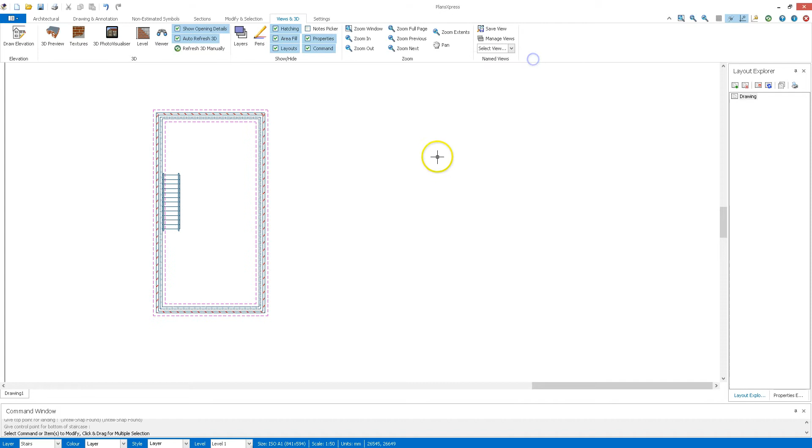Now I've started off with a straightforward ground floor, nothing fancy in there except a set of stairs I can use as reference. Now when drawing a loft you have to create a new level, as we'll be drawing in the loft space itself.

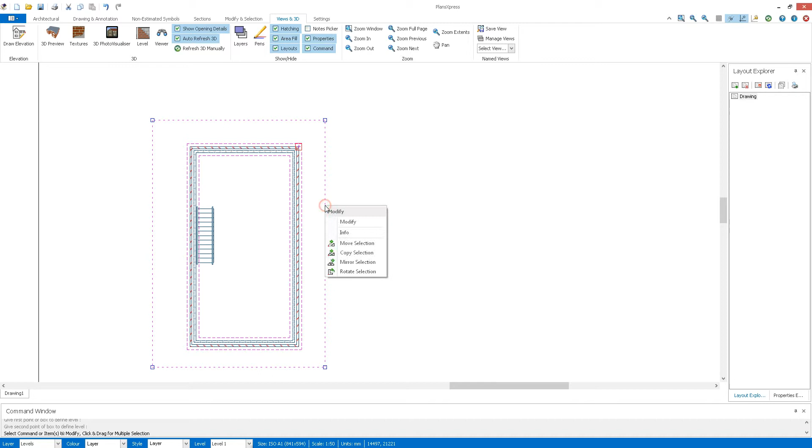So I'm going to grab the levels tool, set my wall height as 2400, as that is what these are. Draw around there, so I've got that level, highlight that, pink dotted line, copy selection, give a reference point, shift and place. Now wall height, I'm going to leave that there, but I'm going to set these wall heights here as 0. This is important, so when I click OK, you shall see that these are here.

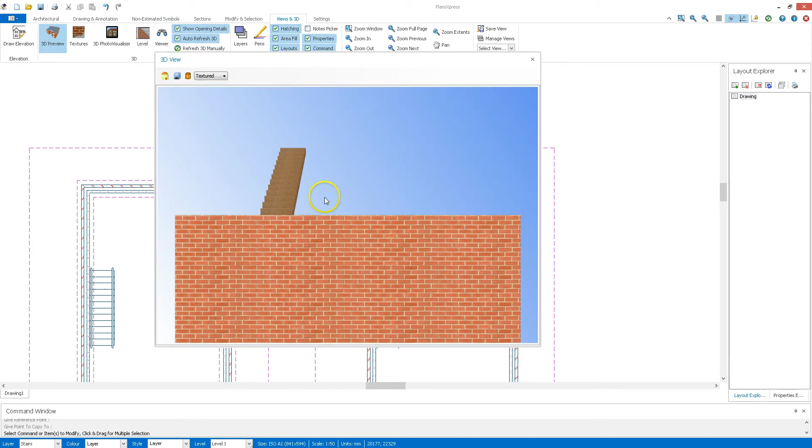If I go to the views in 3D, there's actually nothing there to show. At this point as well, I'm going to grab those stairs, modify selection, and just explode them using the tool, so they no longer show on the 3D, but the lines still exist individually.

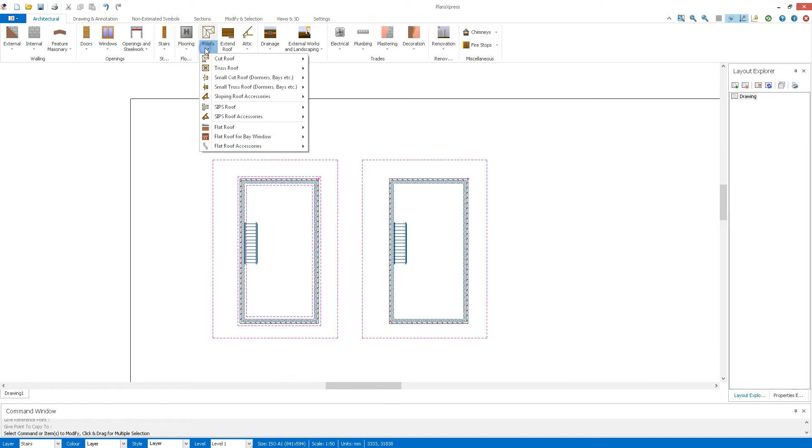Now I'm going to go to my architectural, grab a roof. I'm going to grab a cut roof at 40 degrees. There you go, leave these options as default. Now this building is 5.5 meters wide and 10 meters deep.

I'm going to grab an apex roof on this one now. Select the wall I want to place this on, so the 0 height wall there. That's my apex, or my gable end there, and then the link for the roof.

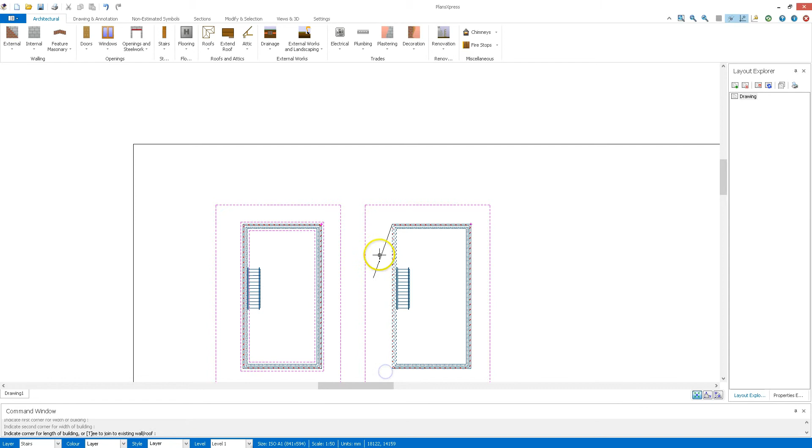I'm not going to consider flat ceiling or any of these options at this point, I'm going to just say no. But as you will see, if I go to the views in 3D now, select 3D preview, I've now got a roof on top. Okay, now I've just done it straightforward on the ground floor here, but obviously when doing your own, it could be on any point of the building, on any level.

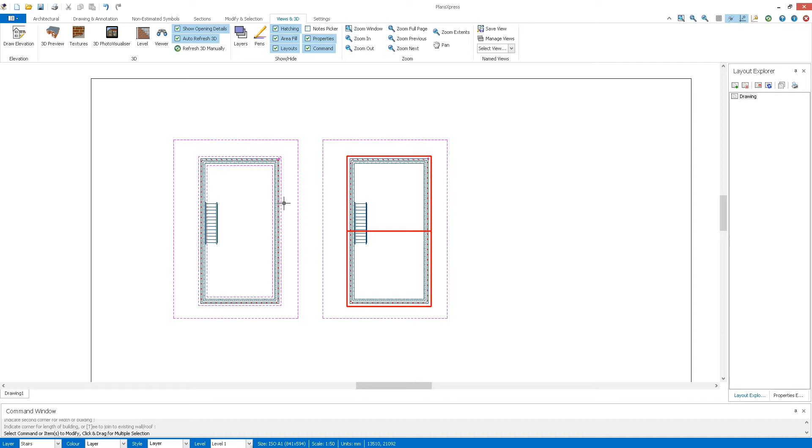In here now, I'm going to start drawing my loft options. So everything you're going to need for this point onwards, for the next couple of minutes, is under the attic options here.

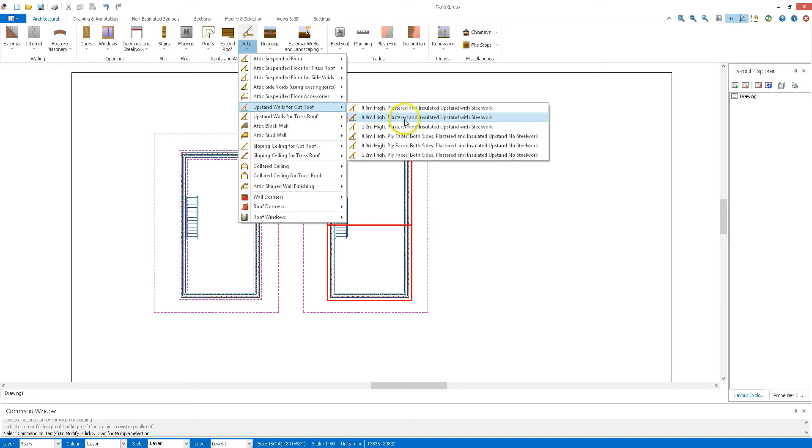Now when we do our loft conversions, loft drawings, there's generally a good order to do these in, and to start off I like to put in the upstands. Now once we've got the upstands in there, it lets us work out where the floors are all going to go as well. So we've got upstands for cut roof, and I can pick out a pre-templated size, say 0.9 high, or I can change these to whatever I want. Now I'm going to leave these as defaults and say 0.9 in there.

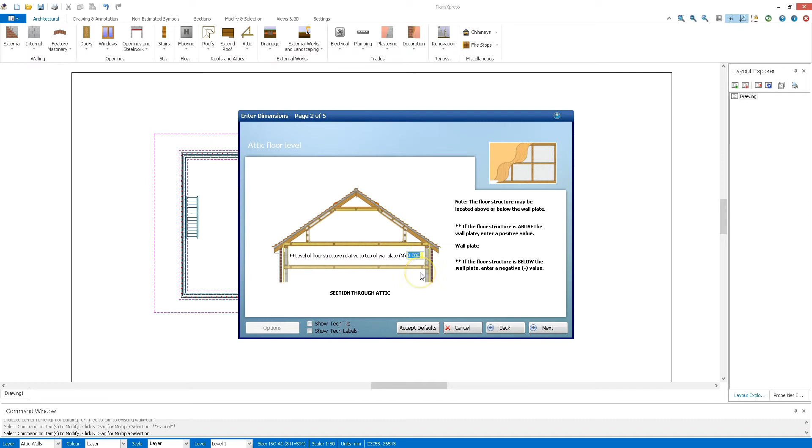Now the important reference here is level of floor structure relative to the top of the wall. Now this means that the floor is 200 millimeters, 20 centimeters above the wall plate. Now if you are having a floor that's below the wall plate, so you've got dwarf walls on the sides, that is important to put a minus symbol in there, and whatever dimension that will be. Now also this dimension will pop up quite a lot in some of the following workbooks we're going to use.

Next again, depth of the bird's mouth. Do I wish to incorporate a steel in or under the upstand? So if you're doing steels in this, you can include them at this point. If you have got very bitty upstands and you're not doing the steels in there, you can just say no and do the steels separately.

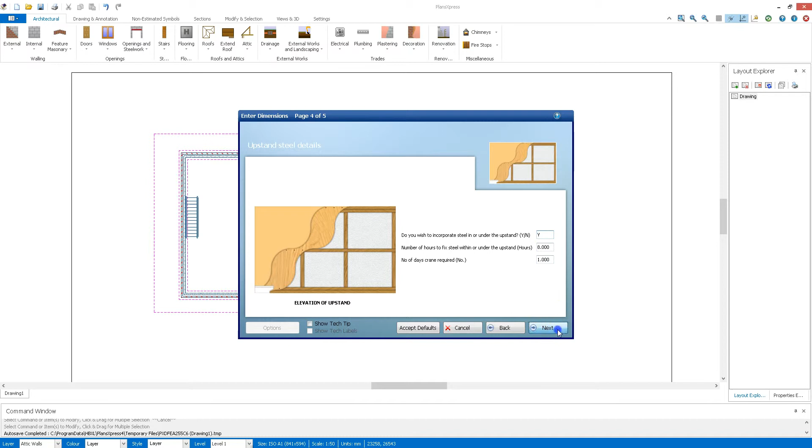I'm going to say yes for the moment, click next. Upstand plastered, decorated, insulated, primed and such. Now under the command window at the bottom here, it says select roof eaves line.

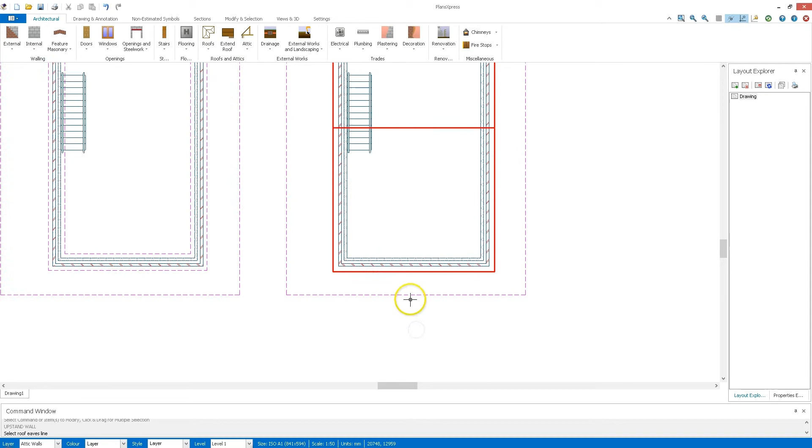So I'm going to select that eaves line just there, and it will draw it in for me. I can right click to bring the tool back up again, accept the defaults as it remembers what I've changed, select that eaves line, and it will place that in for me at the correct position, because the software knows where everything's going to have to be drawn, so it does it for you.

Now it will draw it to the size of the roof, so we can just highlight there with a right to left selection, grab the little blue square at the end and bring these in to the walls.

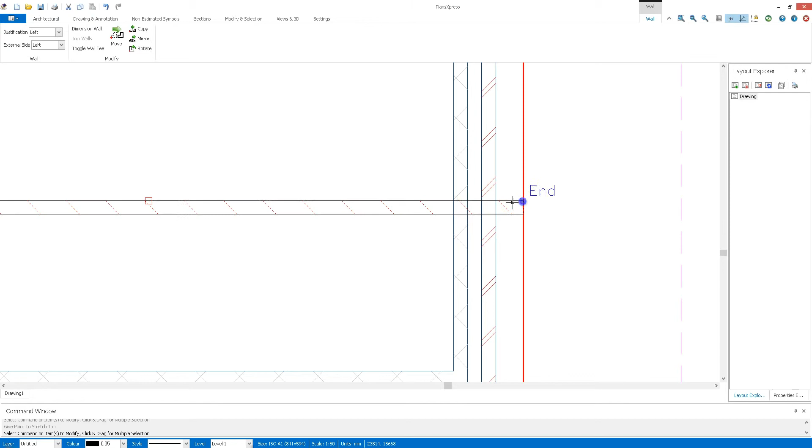But once they're in, we now have, say, what could be the floor size inside.

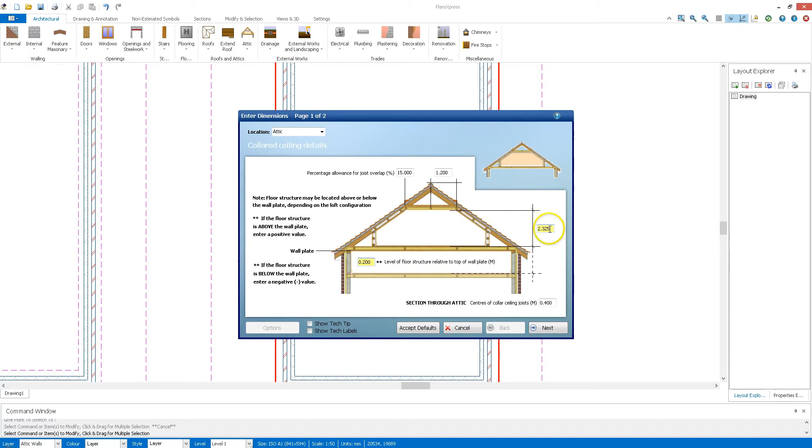Now the next one I'm going to do is the collared ceiling, area of ceiling. Once again, that level of floor structure relative to the top of the wall plate is in evidence here, and I also have height of the ceiling from the floor.

Now I'm just going to give myself 2.1 meters high on this one, and this is ceiling plaster, decorated and such. Click finish, and then once again select eaves roofline.

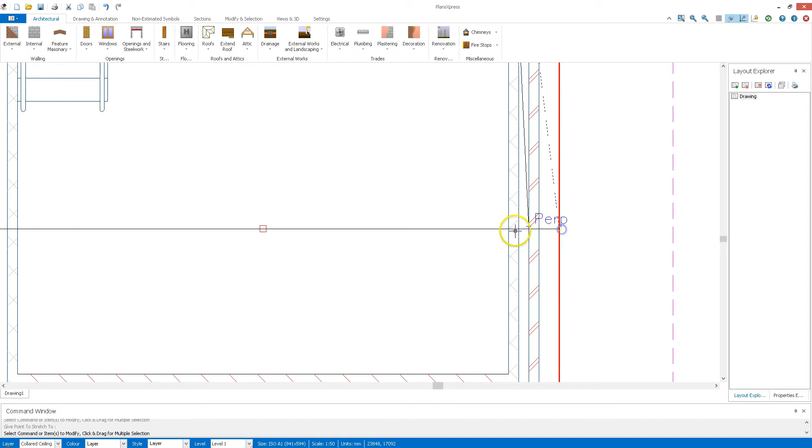Once I've placed that there, it will show me where that ceiling will go, so I don't have to work out this myself manually, it will do this section for me. But once again, it draws it to the dimensions of the roof, so you just have to manipulate the lines there to bring them in.

Now if you've got two roofs tying together, that becomes incredibly useful, as then it just does the shape of the roof for that section. So now, once that's in there, I can go and add in some extra items.

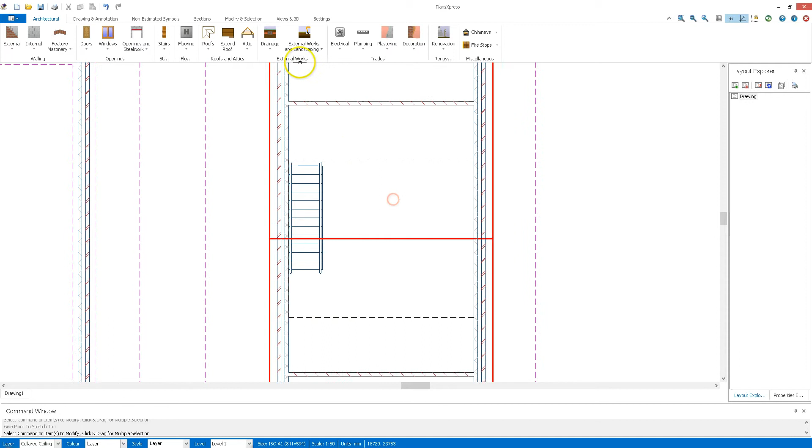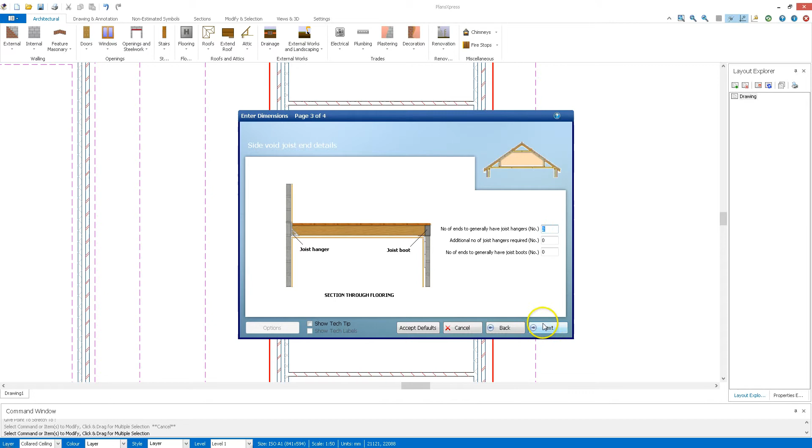Now, I can do these voids. I can go show you one of these voids now. So, standard flooring options there, width of joists, and if there's floorboarding required and such, ceiling plastered, and across from there to there, draw, and there across.

As you can see, the first two points I select are very important for the dimensions. I'm not going to add any perimeter sealant, trimmers or anything as such at this stage. Right click, bring that tool back up, and do these two ends here.

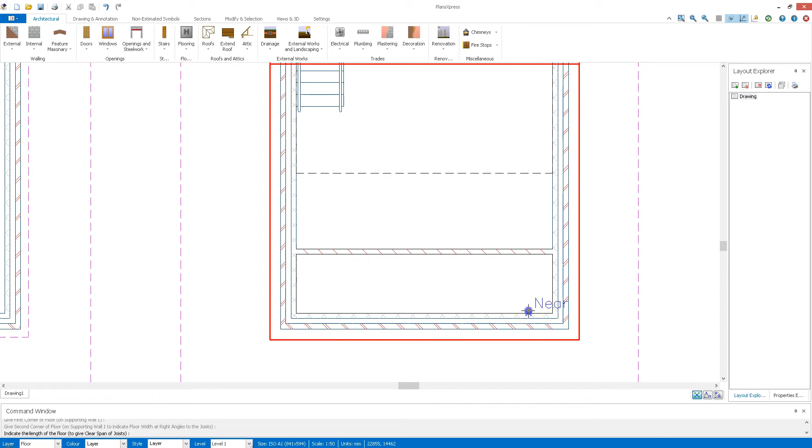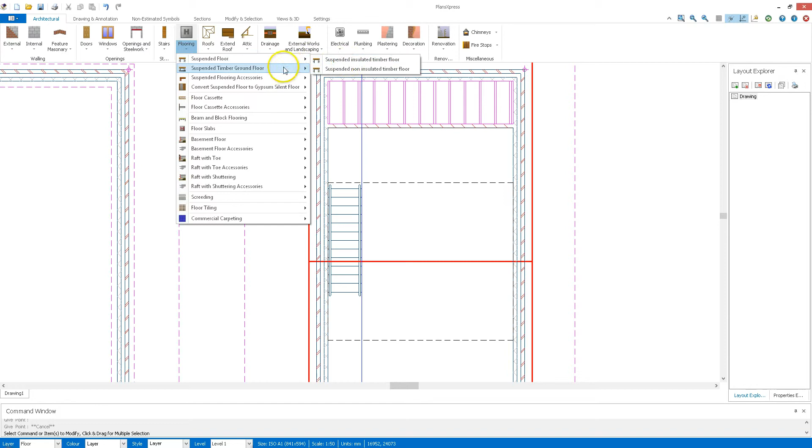Okay, what I'm going to do now is the main floor across. But before I do that, grab a vertical line, place that there. Reason being is that when I do my flooring, suspended floor, there we go, attic suspended floor, plastered and insulated.

I'm going to accept the defaults on this one. I can work between these two points and just draw in the sections that's needed.

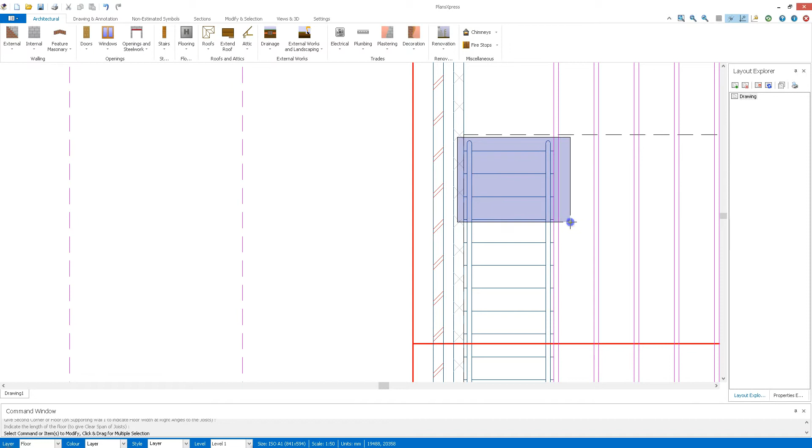Of course, if I don't need some of these, the bottom of the stairs showing there, I can manipulate that so they're not showing. Now, I've just done a very rough grab of that there, so of course you'd want to measure that accurately.

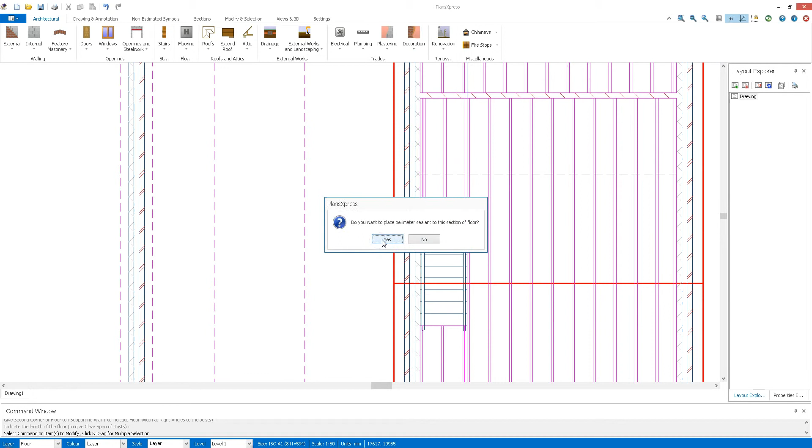But now I've got that out of the way, I can go back to drawing my floor. There we go, I can say yes to the options. I'm going to say no to perimeter sealant, but yes to trimmers. One there, yes to another trimmer, accept the defaults there.

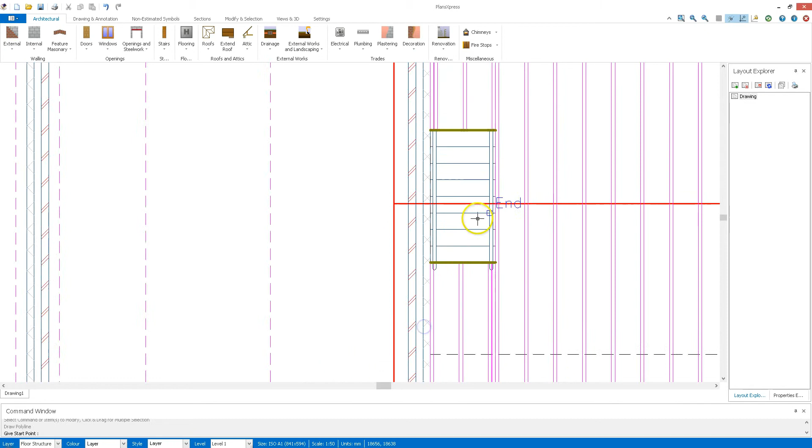If I want to as well, depending on what timbers I'm using, I can even run one from the steel running from here to here. I'm not going to go with end straps at the moment, just leave them off for the moment. Get rid of that construction line, and that's now done.

Now of course we've got the floor in there now, we've got our collared ceiling. We can also go in there now and draw, say, some windows. I'm going to leave the sloped ceiling off for the moment because we can draw the sloped ceiling around any windows we place in.

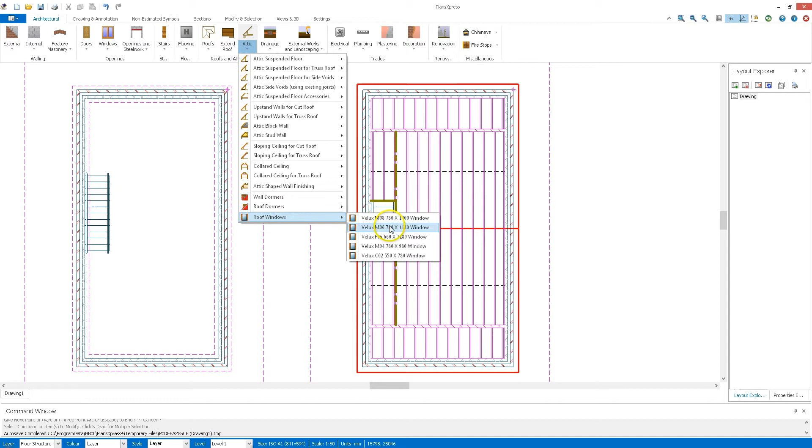So I'm going to go to roof windows, grab a Velux down here, because other brands are available, but those are the ones that we have. Change the sizes as appropriate. Once again, that reference, floor level relative to wall height, and height of top of window from floor.

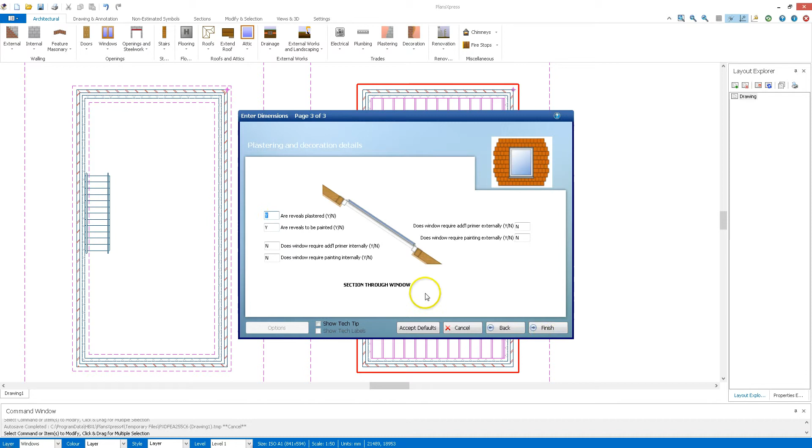So I'm going to change that to 2.1, select that there, finish, select eaves roofline. So I can select that there, and place. I can right click and bring in as many as I want. Every time I place one, right click to bring the tool back up.

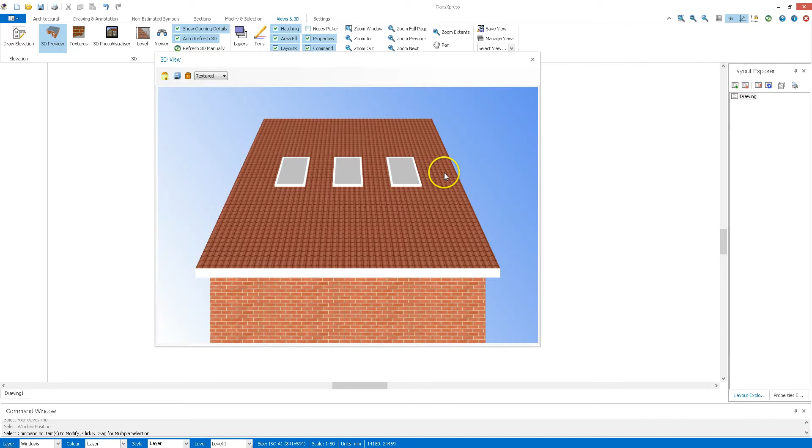Okay, go to my views in 3D, 3D preview, and there's my Velux windows appearing, roof windows and such. I can also go back to architectural, go to attic there, I can go to roof dormers, clad dormer walls, I can pick the dormer for 1800 by say 900 window.

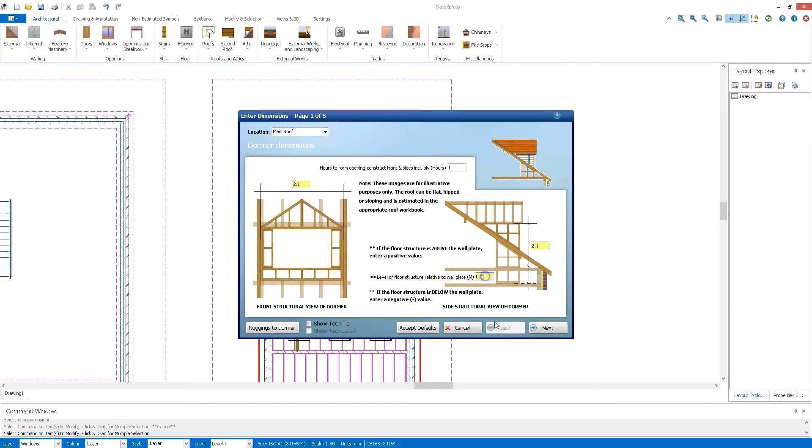Leave these options normal because the floor height's already correct and so is the ceiling. Select next, just making sure my openings are the correct sizes, timbers measured and such - length of top trimmer, spacing of tile lath, batten gauge. Once you're happy with the options there, such as vapor barrier, dormer plastered, click finish.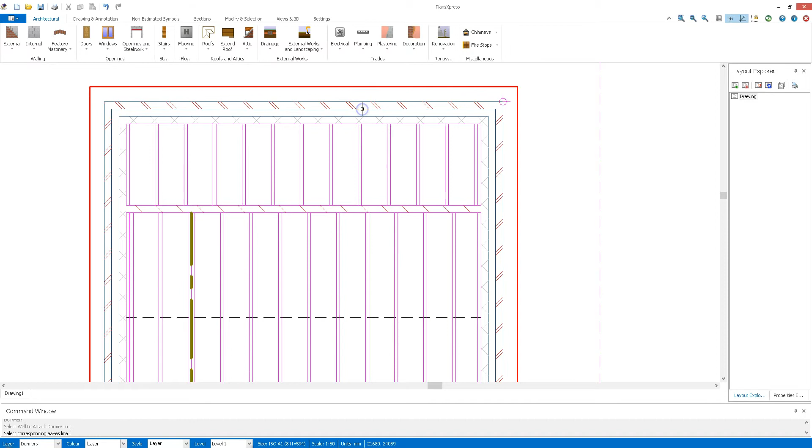Once again, select wall to attach dormer to, so select this wall here and corresponding eaves line, and it will place that dormer in its position. I can just place that there now, and that's done.

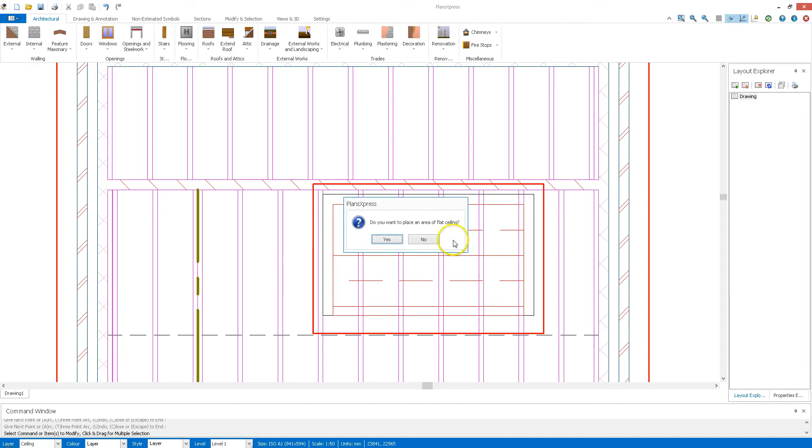Now it won't appear on my 3D preview straight away, but if I go to architectural, roofs, flat roof dormer, I'll just accept those details there, select there, a bit of flat ceiling, close that off, no more flat ceiling.

Not going to go into too much detail on that flat roof, but I do want to go to my Views and 3D preview, and it will now show.

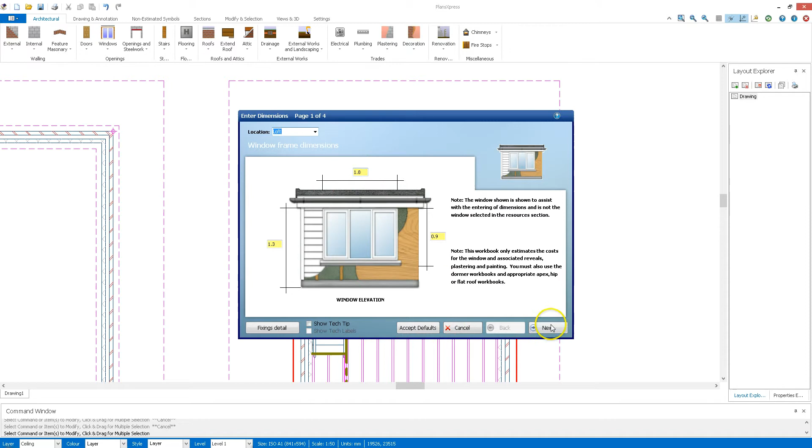If I go to architectural, go to windows, PVC dormer windows, 900 deep, 800 wide. Measurements already done for me, so I'm just going to accept those defaults there and just place that. I'm going to select the snapping option down here so I can place it directly midway.

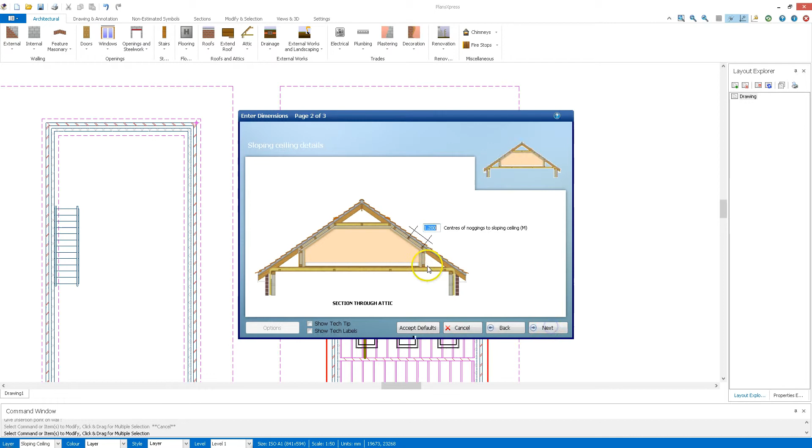Now I've got that in there, I can go back to my attic tools, go to my sloping ceiling to cut roof, select that area of sloping ceiling. So area, additional rafters, strengthening required - I could say no because it's a new roof - percentage of overrun of rafters, next, centres of noggings, sloping ceiling plastered, decorated, insulated, and then select eaves line, click on that corner there.

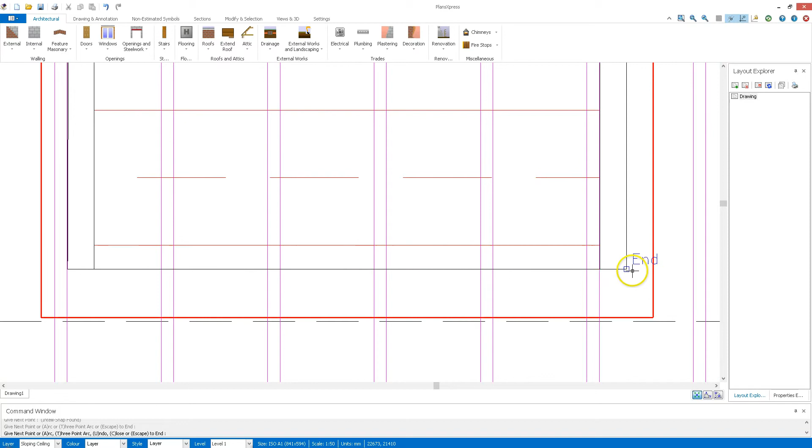And then I can click within this shape here. Now I'm going to go around that window there. Of course, if I'm being really quick, I could just go across the whole lot regardless and just get a straightforward area, but I'm going to be a little bit more detailed than that.

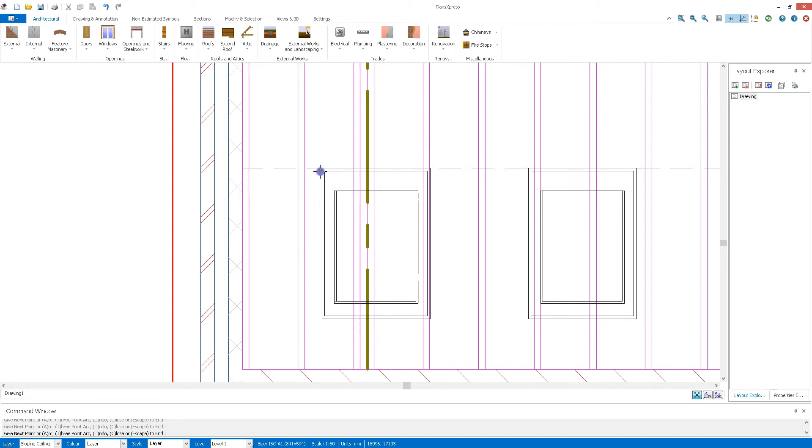And same again over here, select the eaves line and draw my way around these, using the middle mouse there to grab the page and move it around for ease. I'm going to just close it off there, and that's done.

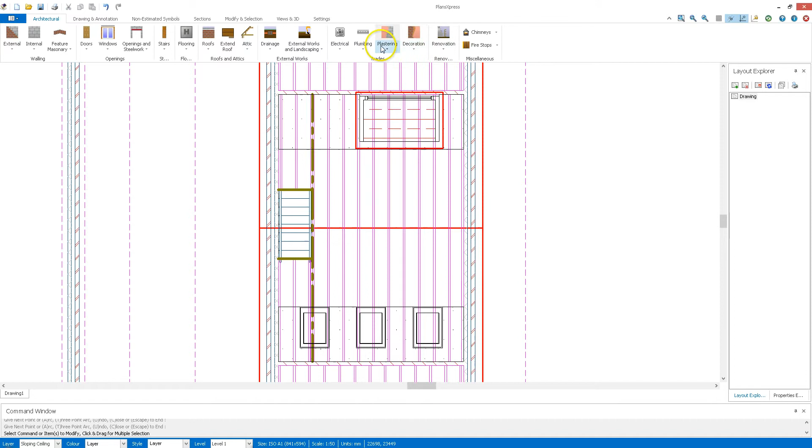Now we do have some attic block walls and such we can place in there. I'm not going to go with them straight now, but in regards to these walls here, if this is a loft conversion that you're doing, then you may want to use plastering to the walls there, attic shaped walls, to decorate them, put plaster and decorate them appropriately.

Now that's done, I'm going to save this drawing to my desktop and call it loft. Save that there.

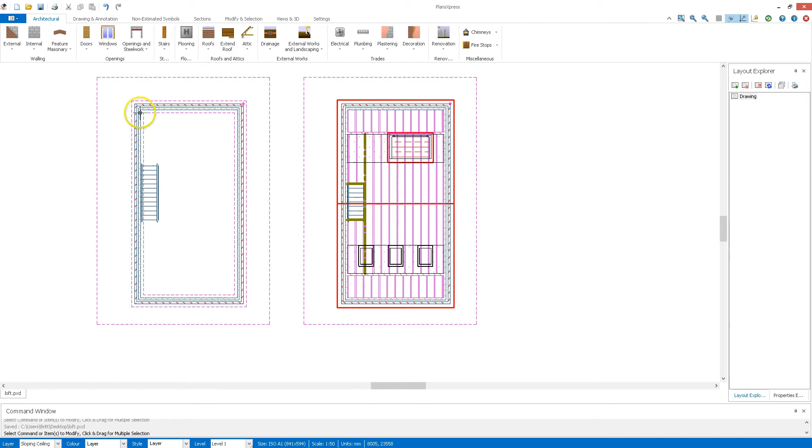Let's see, what I might do actually is I'm just going to set all of this, leave that as is. Go to EstimatorXpress. Now I've already got a job open here, so I'm going to import PlansXpress drawing. It gives me a warning about overwriting items. Select loft, click open there, and it will run that import for me now.

Of course, lofts by their nature aren't always straightforward, but those are the basic tools there that you can implement to draw your lofts. You can manipulate the shapes and sizes of them to fit things as required. That's taken me 14 minutes up to this point. If you've got a more complicated loft, then spending that little bit of extra time will get you the same results.

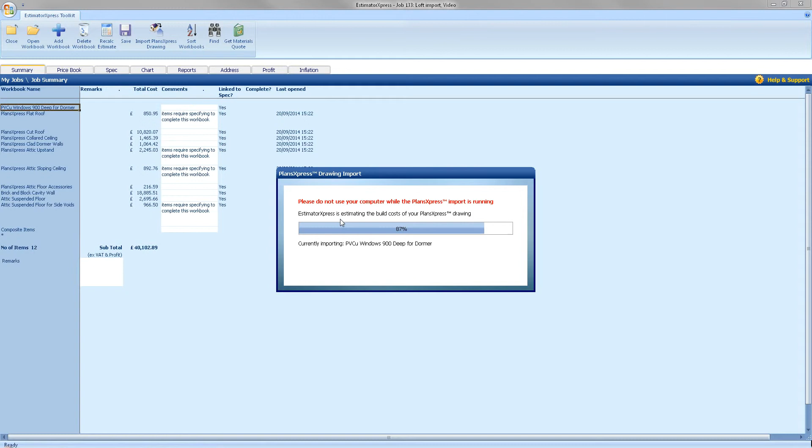Import now done. Of course, there are a few items that require checking in on, as an example, those roof windows. These workbooks will be highlighted for you. If I go into the roof windows workbook now, loft, look at the resources, it was just asking me if I want vapor barrier. That's the case if I am doing this on an existing roof with roof windows, then it can add a bit of felt to help patch up the hole you've just ripped in the roof to fit the window.

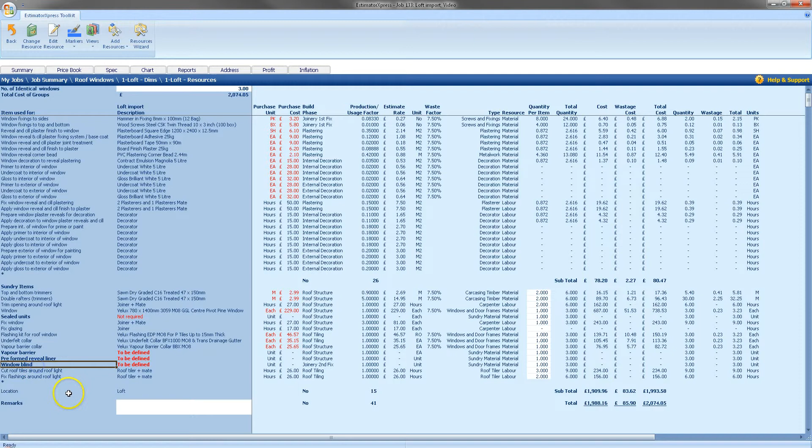Sealed units not required, and also say preform liners or blinds. I'm not worried about any of them, so I'm going to come out of there now, go back to my summary, don't need to look at them, and leave that as is.